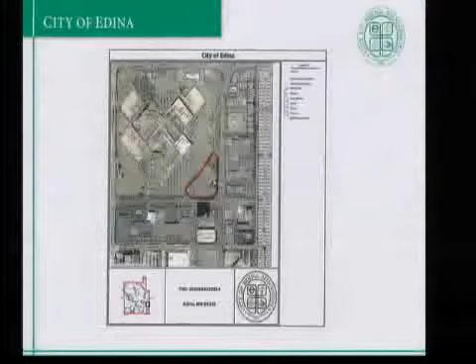Thank you, Chair Grabiel, members of the Commission. Before you is a development proposal for the southeast corner of the Southdale site. Specifically, the site is located at the intersection of 69th and York, this location here. It exists today as a kind of an overflow parking lot for the Southdale Center and the restaurants on the south end, and also a park and ride facility for Metro Transit.

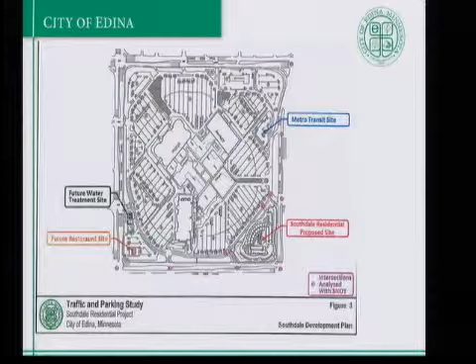The Metro Transit facility is to be relocated up into this location here, close to the JCPenney parking ramp. Just quickly show you a couple of elevations of what that facility might look like. Still working on those plans, but that would be located up here. The proposed development would be located here. As you recall, when we talked about this in the sketch plan review, I believe members of the commission asked the applicant to provide an overall or a future development plan for what they envisioned Southdale in the future. And this was what was submitted. Really, the only additions would be they're seeing a potential for a restaurant site out on the corner here, and then the future water treatment site that would be located under the water tower.

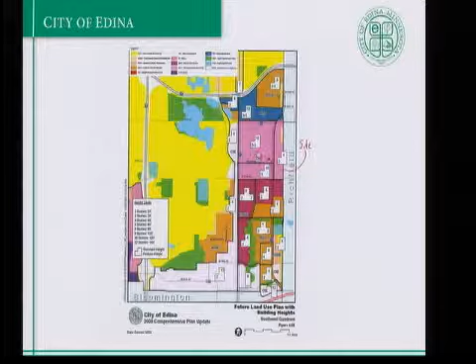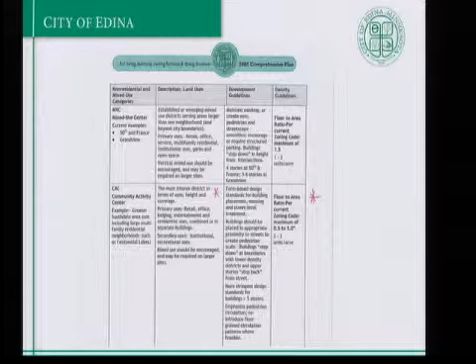Moving on, this site is located in the Community Activity Center as defined in the comprehensive plan. It guides this site for building height up to 12 stories with a 3 to 5 story podium height suggested brought out to the street. This site is the most intense zoning district in terms of uses, height, and coverage that's allowed in the city. The floor area ratios allowed in this property are up to 1.0, and the proposed development is just at 0.43. So the site is actually quite underutilized in terms of the floor area ratios that could be allowed at the Southdale site.

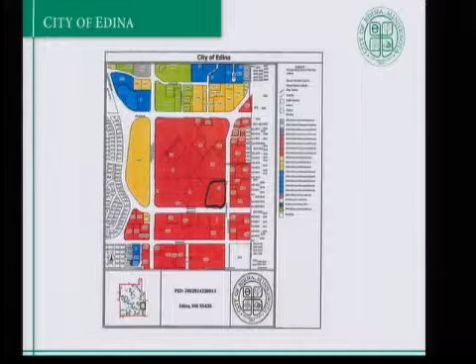The site is zoned PCD3, our commercial zoning district. Residential uses are a conditionally permitted use in that zoning district. The idea is to integrate residential within commercial property. So what the applicant is proposing is to construct 3 new buildings that would total 232 rental apartments and condominiums. There would be a 10-story building proposed along York, located here, a 6-story building along 69th, and behind it a 3 to 4-story rental townhome project that would face inward or face Southdale. For perspective here, this would be the Westin to the south. This is the 4-story apartments, kitty corner, and the CVS pharmacy.

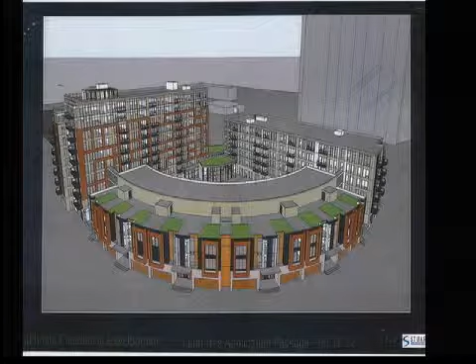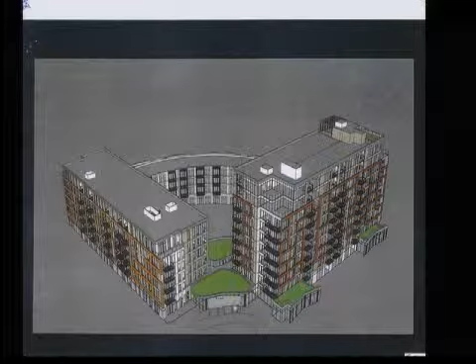They're proposing a series of green roofs. This is the podium. We talked a little bit about that in the sketch plan review, and I believe it was all the way across in that review, so they've shortened that up somewhat, and these 1-story bump outs are proposed. This is that main entry off of 69th and York, right at the intersection there.

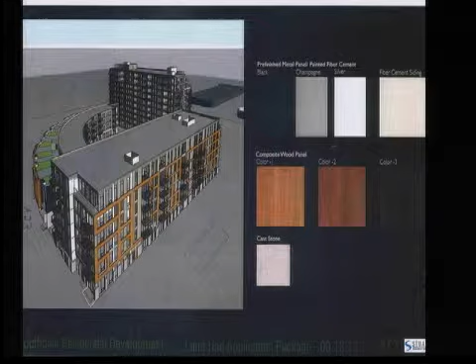The construction materials would be a composite wood panel with varying colors, pre-finished metal panel, cast stone and cement. The applicant has a materials board for you to look at this evening, and they'll go into more detail. It's somewhat similar to the project Stuart is building in Bloomington on American Boulevard, though the materials there are brick, so there's a change.

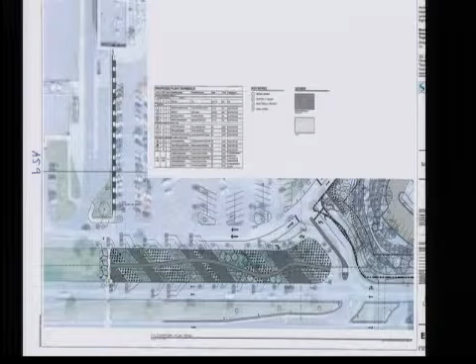They're proposing a series of pedestrian connections. What's highlighted in green would be the new sidewalks they're proposing; the orangish color is existing. Residents wanting to access Southdale Mall would come out to 69th Street and cut across what is basically a vast green space today. This is what it looks like today, where they'd install that sidewalk and connect with an existing connection from the Galleria up to the south side restaurants.

The request before you tonight includes a site plan review, a conditional use permit to allow the residential uses, a front yard setback variance from the required 115 feet, based on building height, down to 63 feet, and a parking stall variance for Southdale from 6,747 stalls to just over 6,400 spaces. They're also requesting a replat of the entire Southdale site.

The access into the site is similar to the sketch plan we looked at previously. It would be a right-in, right-out on 69th, and an additional access off the frontage road for Southdale, which would be turned into a two-way for better access for residents. They would also utilize the existing entrances into Southdale along York and 69th.

Parking for the project would primarily be underneath the building, with 287 stalls underneath, accessed from the north and west sides. There would also be a couple of surface lots on the south side and a smaller one on the north side, totaling 55 stalls.

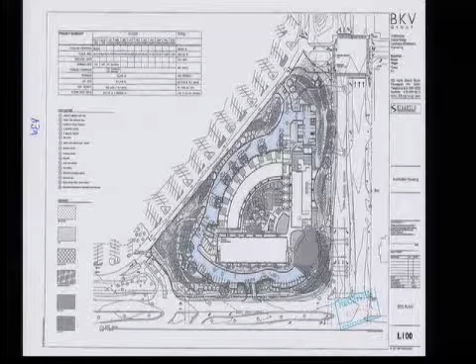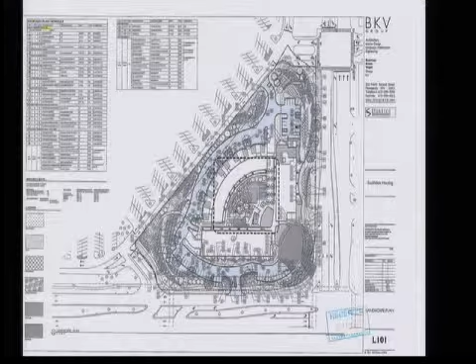They're proposing extensive landscaping. Primarily the site is all paved out there currently. Based on the perimeter of the site, they need 54 overstory trees, and they're proposing over 130, with a full complement of understory trees. So there would be quite an increase in landscaping and green space with the project.

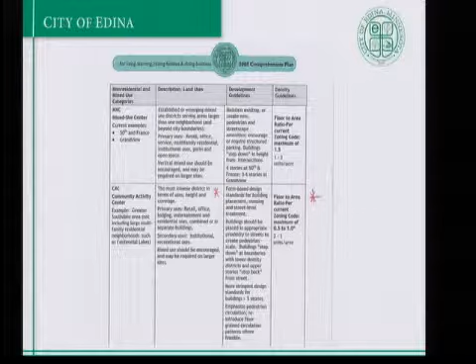In terms of the comprehensive plan, as touched on earlier, it encourages mixed use. This would be the first residential element introduced onto the Southdale site. And again, the site is really underutilized when you take a look at the floor area ratio for what could be allowed here.

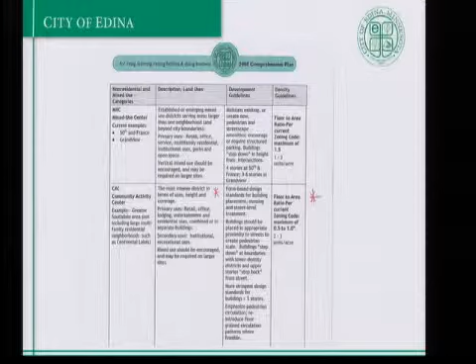Some of the policies and goals in the comprehensive plan that this project would meet include locating prominent buildings to visually define corners and screen parking lots—we saw the elevations from 69th and York—providing sidewalks along primary streets and connections to adjacent neighborhoods along secondary streets, and increasing mixed-use development supported by adequate infrastructure and roadways.

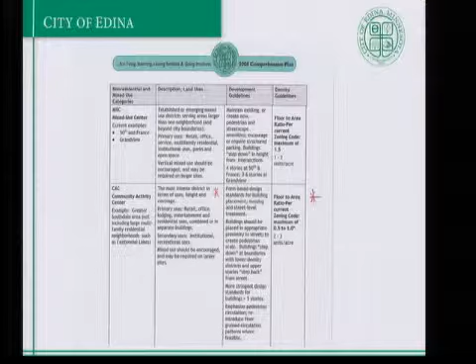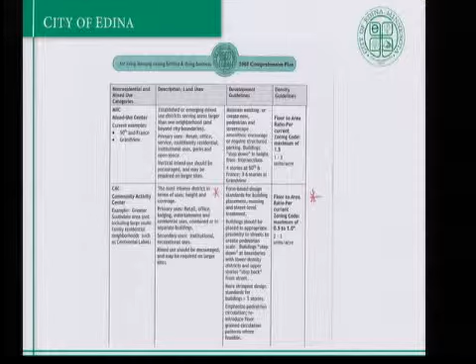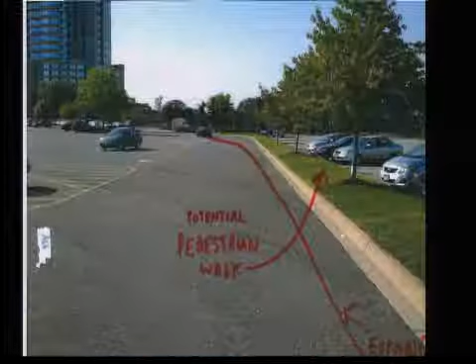We're just providing this as an example; it wouldn't necessarily have to be this way, but there is an opportunity. There's an existing green space located right here that could lead right to that mall entrance. This is a look at that green space today. Potentially it could be widened out, maybe losing a couple of parking spaces and shifting the roadway over, but it would provide that connection to the mall. So we're suggesting that a condition of any approval would be to add that additional connection.

A traffic study was done by WSB. Chuck Rickart is again with us this evening. The study concludes that the proposed use wouldn't change the level of service on adjacent roadways. There is a recommendation for additional queuing space along 69th to allow left-hand turns into that center, which is suggested as a condition of approval.

Parking study was also done based on that parking variance that's requested. Based on all the uses at Southdale—the restaurants, the theater, the square footage of the retail space—over 6,700 spaces are required. Overall, the Southdale site would provide just over 6,400 spaces, so there are 305 stalls short.

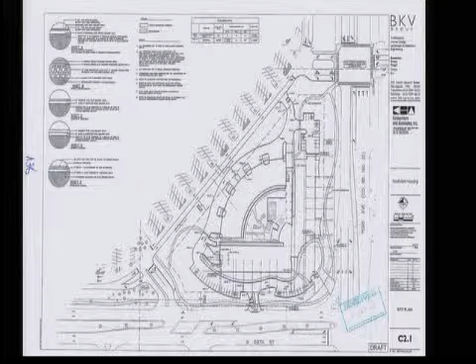That variance is requested. The study concludes that 5,952 stalls are necessary to support this project. Also want to remind the Commission that back in 2001, a 759 stall parking variance was granted for Southdale when the restaurants and the theater were added to the center. So there is an existing variance, and the number of stalls required is actually reduced, based on the square footage of the center changing and the number of restaurant seats within the center also being reduced.

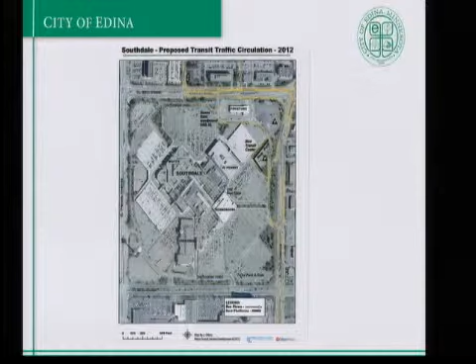In looking at the conditional use permit criteria, staff believes, as outlined in the memo, that all the conditions are met as long as that additional pedestrian connection is made with Southdale. In looking at the variance standards for the two variances, staff believes that the request is reasonable. The variances can be supported.

The city code, as we've talked about in the past, suggests that buildings be pulled up to the street to create that active pedestrian environment between buildings and the street. The requirement for the large setback runs contradictory to that policy and goal of the comprehensive plan.

The Southdale site is unique in itself, given it's an 80-acre parcel, a little bit underutilized when looking at the floor area ratios. We feel that the building is in character with the area and would fit in given the varying heights located out there, with the west end at 18 stories, and Southdale roughly equal to the 6-story project. The parking stall variance, based again on that study, is reasonable.

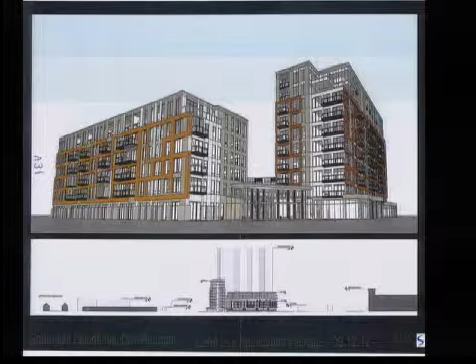If parking were ever to really become a problem out there where there was a shortage, there's plenty of room on the site to build a structured parking if needed.

As I mentioned before, there is a subdivision request as part of this application. Currently there are 9 lots that make up the entire Southdale parcel. As a result of the replat, there would still be 9 parcels. What they're proposing is this area in purple would be combined with the larger Southdale site here, and then they would create the new lot down here for the development. So it's just a shifting, essentially, of that lot down to the south.

Because there's no additional lot being created, park dedication fees can't be collected by the city. There's no new lot being created.

The primary issue and conclusion for the Planning Commission to consider is whether the proposed development is reasonable for the site, including the conditional use permit, and whether the variances are justified. As staff has indicated, we believe the proposal is reasonable, that the conditional use permit criteria is satisfied as long as those pedestrian connections are made, and that the variances are justified. So with that, staff is recommending approval of the site plan with the variances subject to the findings and conditions in their staff report, and the conditional use permit, again subject to the findings and conditions, and the preliminary plat approval. With that, I can turn it over to the Planning Commission for any questions.

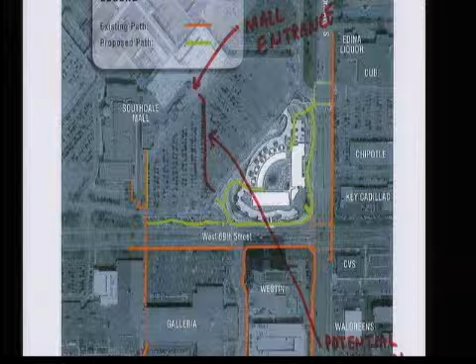Commissioner Fisher: Mr. Rickart, when you were doing the traffic review, I found it interesting, the recommendation to put the left turn lane on the westerly drive in. Coming that way to the mall today, every time I drive by there I think, why can't I turn left here? So I'm always doing that move back around. Do you know why historically that wouldn't have had a left turn lane there? It seems logical there would be one, but I didn't know if there was a traffic reason why you might not want it.

Obviously I wasn't involved in the original studies when they switched the internal circulation on the mall, so I can't tell you why. Unless there was a concern back then that traffic would back up to France Avenue for some reason, that's the only thing I could think of. But there's really no need not to have it. I didn't know if, as the traffic guy, you'd say oh, it's the old XYZ shuffle move they did—nothing scientific about it. No, not that I can see.

Maybe sometime you can come talk to us about the XYZ shuffle move. You'll need a long meeting for that. Other questions of Mr. Rickart? Thank you, sir. Would the applicant care to make a presentation?

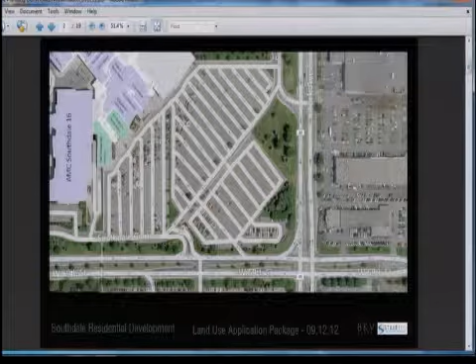Moving forward, I wanted to address part of the entry question to the mall that was raised earlier with the connection, and I'll come back to this later. There are two entries to Southdale, one here and one a little bit closer, right behind the Cheesecake Factory.

Looking at the new site plan as it has advanced from the previous scheme, we wanted to point out how we've incorporated a lot of sustainable features and enhanced the streetscape from what is presently there, the impervious surface of the parking lot. We've replaced a lot of that. Right now, this site plan has 42% pervious surface, taking it down from 100% impervious to 60%, and we feel that's quite well achieved.

We've done that with a lot of berming instances. There's one here to the north, you can see another here, and as you come around the corner in some of the images you've seen, there's one wrapping the entry at the corner of 69th and York, as well as some more along the back and the southwest corner.

With those berms, we're almost doing a reverse to capture a lot of our stormwater with stormwater gardens—taking a berm that goes up and inverting it so it goes down right next to that, planting it with flowers, plants, rain garden types of things, and letting stormwater filter down through that, helping the site very much.

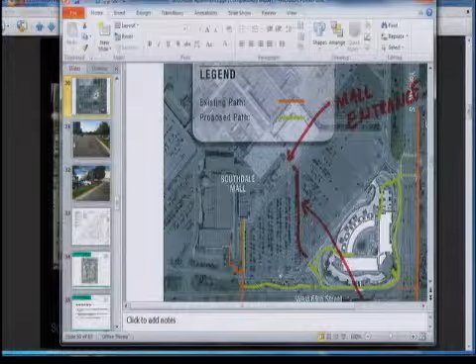One of the other questions you were asking about was bike parking. We've added bike parking right here at the front entry, more bike parking back by this back connection, and as you move through the site and come to the back entry, there's bike parking there as well as bike parking inside the parking garage.

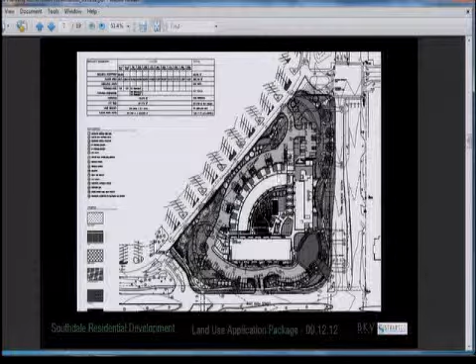In the amenity spaces, we have a pool in the center, and I do have a close-up of this one if I can get it zoomed in, please.

So this is the enhanced central courtyard. I know there was a lot of discussion about making it an amenity space. This is the club room with the green roof you can see here as you move from the front entry through this space and exit out into the courtyard.

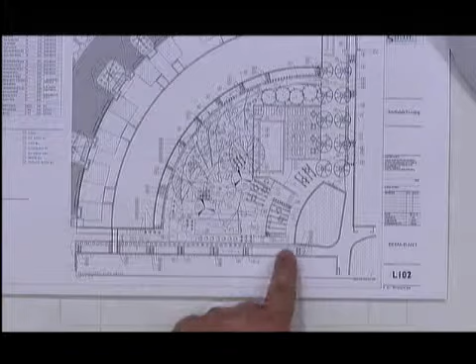What we're creating here are some unique little pergola spaces. This space has a grill section, some tables and chairs, steps down and a ramp down into a lower section with another pergola and seating. We have a focal point of art or a fountain located at this point.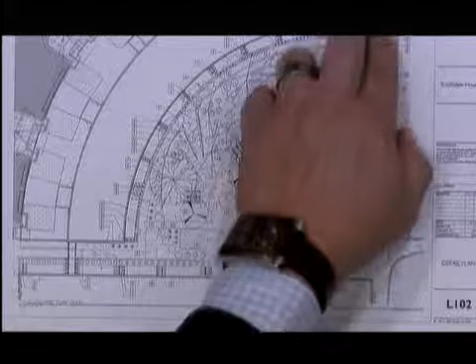We have access from the north coming down this walkway with some beautiful trees and planters to create a great look. Again, a focal point of art here.

As you move to the central courtyard, we have a pool enclosed by a wall and by another one of those berms I've been talking about. Some earth wraps around this, so it's cut out within that space with a little decking.

And the pool space here. We wanted to create some contrast between active and passive spaces, spaces for exploration or meditation, kind of loud and soft, if you will.

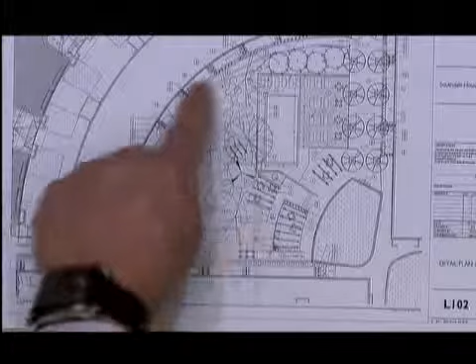So within this space it's a little bit more wooded. Because we are not over the parking garage here, we can plant big trees and they can grow to quite large sizes. So we're planting a lot of larger canopy trees here with a couple little nooks out in the forest for people to go and sit.

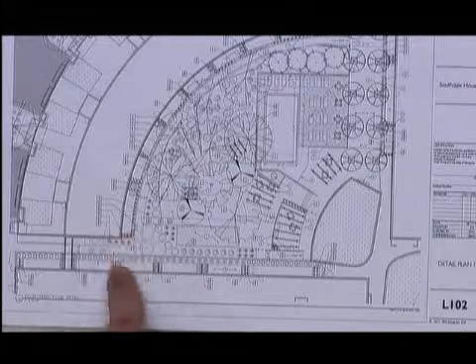We have a bocce court along the south edge for some active play space, and then a walkway all along the back for residents to go to their individual patios and entrances to the flats. Those are also along this edge.

And you can see here the green roofs on top of the condominiums, which will give a great amenity to those spaces. So with that, I'll turn it over to my colleague, Mike Krish, to talk a little bit about the architecture, and then we'll both stand for questions.

Thank you, David. Mr. Chair, members of the commission, my name is Mike Krish with BKV Group, and I wanted to speak a bit about the architecture. I'll try not to take too much time here, but I wanted to speak about a few things that create the character for the project.

But first, stepping back regarding the process for the project, I'm going to go back here one. Oops, I will leave it. The process, as we looked at the site.

Part of what we thought was very exciting about this, the Westin had established a level of quality in the area that was new and fresh, that began to start invigorating Southdale as a prime center for the city of Edina. And we wanted to be able to capture that energy that was established and add on to that, and weave that kind of energy into our project that would begin to knit not only that project with ours.

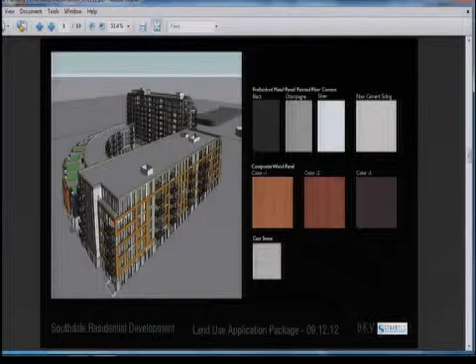In the 6th story, it wraps up to create the base of the building, and you find it in the individual townhomes along the curved arc. We wanted to make sure we integrated that, along with the use of rich colored woods and metals—classic, timeless materials we wanted to bring into the architecture, similar to how we looked at the neighborhoods to integrate those rich materials into the organization of the building.

Here's an image you've seen. The idea of using wood as this outside layer, like a coat or skirt that wraps the exterior, yet reveals elements behind it and allows balconies to bridge through it, creating a rich dynamic of materials.

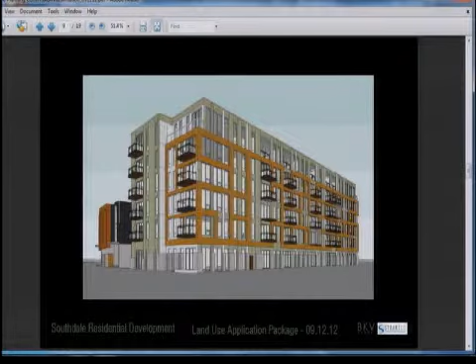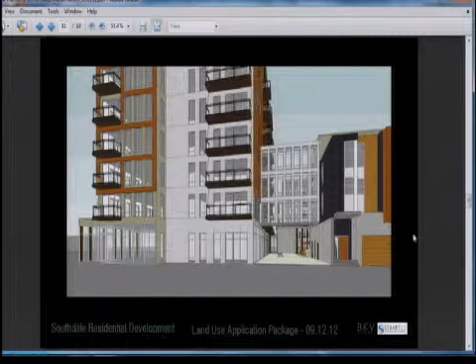As it wraps the corner, there's no two sides exactly alike, which is part of the elegance. As a pedestrian walks the site, every view changes—the building itself moves and becomes very dynamic. This is a view on the north side looking into the courtyard, revealing different layers of materials and bringing a high level of energy to the project.

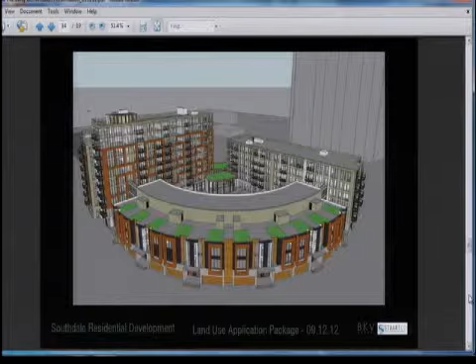The use of green roofs is part of what we're incorporating, so those roof surfaces become interesting and pleasing elements to look at even from above. As you go around the building, it's constantly changing.

Going back to the organization, we looked at the city's plans, which talked about reinforcing the grid and street edges. So we positioned this as a collection of buildings rather than one big monolithic structure—breaking it into 3 separate buildings, with the 6-story along 69th paralleling that street. We broke it where the main entrance is, reinforced by landscaping and the plaza, with a smaller-scale main entry piece that brings it down to pedestrian level and lets you see through the development to the courtyard and past.

Then we have the 10-story building paralleling York, creating a dynamic with the 6-story building. Along York at the base, we bumped out the first level for different functions—the main entry is its own form, and the fitness area bumps out as it marches along York to create its own podium component. The whole first floor has hiked-up materials to reveal the base and legs of the project, creating a pedestrian realm that's unique and differentiated from the building above.

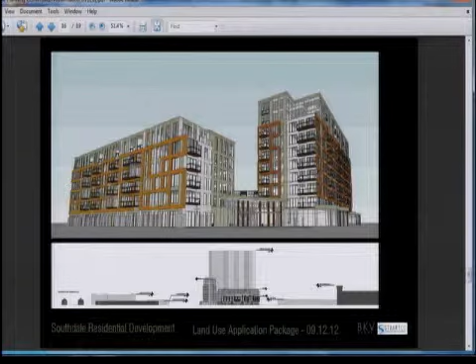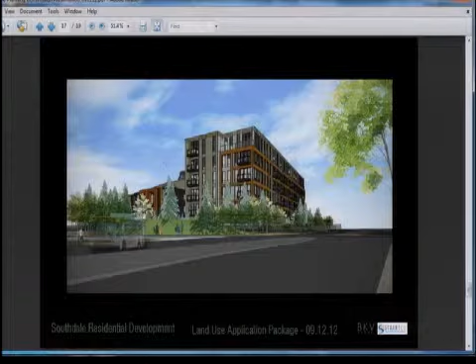It's also animated with residential scale and character through projecting balconies with accented black colors, adding another level of detail. Here are some images showing the integration of landscaping, which is very important, along with berms and trees. This isn't an isolated object—we're creating an environment that's pedestrian friendly, changing and moving throughout the site.

If you have questions regarding any specific details of the architecture, I'd be happy to answer those for you, but that gives an overall sense of the character.

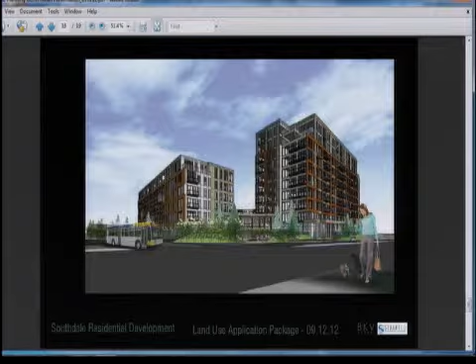And just to finalize, we thank the staff for all their hard work. It's been great to work with them. We have just, as I pointed out earlier, the one question about adding the pedestrian pathway in the location that staff is pointing out. We think we are meeting the intentions that the commission asked for with the pedestrian pathway I've outlined. So I just ask your consideration for that. And I think we're okay with all the other conditions.

Okay, thank you, Mr. Motzenberger. I got a couple questions, and we'll see if other commissioners have some questions.

You mentioned water. I assume that since you are taking what's now a parking lot and building on it and adding more landscaping, the water runoff will be less than what it is potentially now. That is correct.

I like the configuration of your sidewalk. It does go over, and you can access the theater as well as the upper mall and the promenade through the Galleria. But when I was in high school, geometry was the one math course I was good at, and the shortest distance between two points is a straight line. Do you have any objections to adding the additional suggested pedestrian access, which goes more directly to the mall entrance up by, was that Herberger's now?

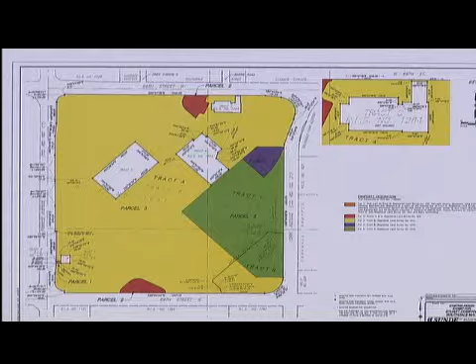So one of the things I'd like you to, and it may not be on this drawing, but I wanted to use this drawing to highlight the big picture. What I'd like to get a feel from you about is how do you see the backside interacting if you can envision for a moment something developed right across, right next to, outside those townhouse doors? What have you done in terms of the site plan to make it? What I don't want to do is back us into a corner that prevents the next thing from developing. And I wonder if you have some thoughts on that, and how you might share where on the upper left hand of this drawing, suppose something developed across there other than a parking lot. I don't know what it is, but something. How would your development interact with that?

Chair Grabiel, Commissioner Staunton, thank you. That's a good question, and it is something that we've thought about, understanding it in the present tense and the future tense, and how we want to work with the views at present and how that can be adapted. One of the key pieces we looked at here, this is an easy one because it's a simpler drawing to see just where the landforms are that we're proposing along there, to help screen some of that parking at present from the townhouses.

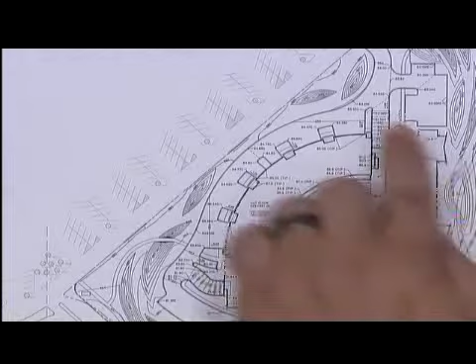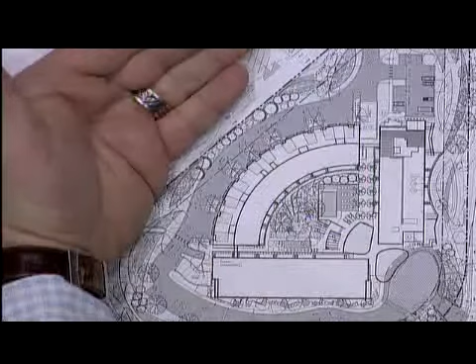However, because of the landforms and because this is planted in this location, it offers the opportunity, should there be something built across this, to reconfigure this. Even the plantings that are here now are configured in such a way that they start to create a corridor, so you almost start to have a street. There's an opportunity to almost mirror this on the other side as a front door to something that might exist on this side, so you start to create a street.

Some of these evergreens that are now screening views might be switched out for some canopy trees that could begin to create like an allée that is along most residential streets. You can still have some of the interest of the berms in there, but you begin creating a street envelope, and that building setback here could equal the building setback on the other side, creating some nice space there. So I think it is set up for that opportunity.

Thank you. Commissioner Schroeder? Well, I've actually got a lot of questions, but I'm just going to focus on one for now.

I want to go to the issue of the setback relief that you're looking for based on our staff's comment about creating an active pedestrian environment at the street. You said that you think you have a decent enough buffer, and I'm curious what that really means, because if we're trying to create an active pedestrian street, we don't actually want a buffer. We want the development to interact with the street, not separated by a buffer.

I think you're going to come back and say the traffic will be buffered, but I want to know how the two interact. We're granting significant relief, and where we've looked at this before, it's been to create active storefronts. In fact, when we had a proposal, which is now CVS, the former proposal was actually talking about an active pedestrian street front being created by having active operable doors on the sidewalk that's in the public realm. And we don't have that.

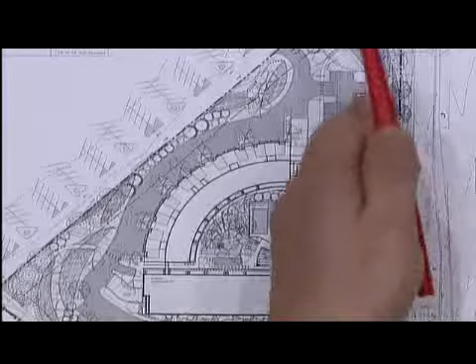As with anything on a heavily traveled street with no other active frontage on this side, we think that we're striking a balance between bringing people close to that street and giving them ways to access north and south and across, but still, as you alluded to, buffer them from the traffic.

With this space here, I'm trying to look for a scale, but from the property line to the front of the building is about 63 feet. So you're quite far back for any of the pedestrian uses here, but you're then about 30 feet from the walkway. So people that move through this walkway can take advantage of seeing the folks out on their decks and grilling, enjoying the summertime. At this location right here, they're very close to the fitness opportunity, so people working out, you're bringing that vitality out into the space.

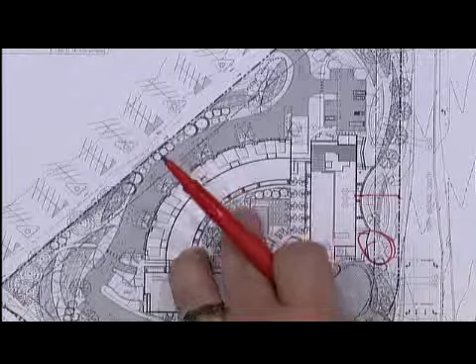And I think the intention with this building is, it's not a mixed-use building. The market is calling, in this instance, for a residential building, and that's what we're providing. We're trying to accommodate some of those uses in a residential sense. I'm seeing a lot of mixed-use buildings that are going without and having a large struggle filling those first-floor spaces right now. But the main reason is that this is a residential building, and we're trying to get residential uses that are active and bring them out. Of course, we wouldn't want a football field or anything like that out here, so we're trying to strike a balance. I hope that answers your question or moves towards it, but that's our goal.

The other thing I want to ask about is there's another frontage here, and you talked about that frontage, particularly as you move west past your project, that it would be landscaping creating the active frontage along the street. Can you talk a little more about what that really means? I'm curious how landscaping, regardless of what angle you place the plantings at, actually creates an active pedestrian environment unless there are people actually out there.

Yes, I think that's a great point, and I would want to clarify that. I think the way you're designing the landscape, what we're proposing with the layers that you're moving through, we're creating this set of layers that you move through as you walk through the space. As your angles are moving in this direction as you're crossing them, that's a visual excitement to the eye. So in an active sense, that's my reference.

And as the pedestrians move more and more, again, as we've indicated, the goal of this is to be the kind of catalyst. Hopefully in the future, more corners will develop, things across the street will develop, and there'll be more and more people traversing this, coming up from the south, from Centennial Lakes and the Galleria, and maybe moving off to visit people at this location or continue on to Cub. And so that space will get more and more pedestrian traffic, and hopefully that will activate the space.

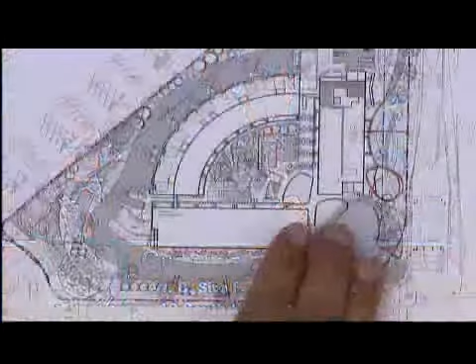Commissioner Schroeder, if I may add, the main focal piece of this whole project starts with where the entrance is. We've set that entrance facing out to York and to 69th, and I just want to make sure that's not overlooked. That's where all the energy starts, at the entrance where we've created a drop-off area, the main entrance to the building. We have our fitness facing out to York Avenue that can be used 24/7.

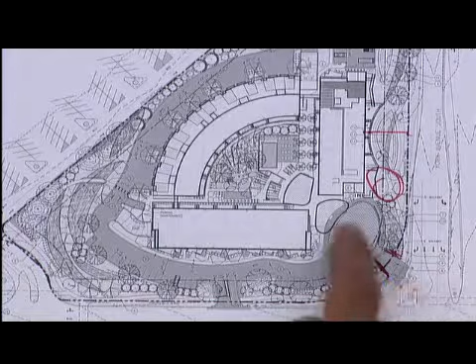Within the front door, we have a computer cafe that looks back out onto the plaza. The plaza we see as being inhabited with people. We have benches and places to sit all along this. We cut through with the berms and create benches at the corner that create a pedestrian scale to the development, yet allow people wandering about to cut through to the main plaza, the main lobby, the computer cafe, the main concierge reception area. All of that is part of that front door, which we think is activating the main streets, which is York and 69th, and we think that is very important.

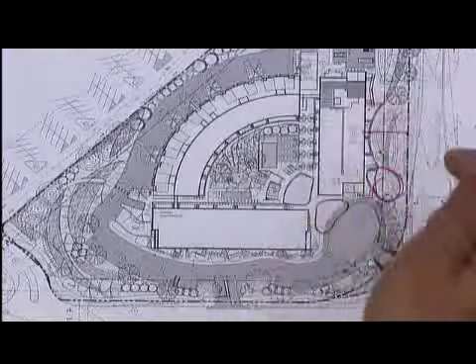Like David mentioned, the dwelling units on that floor have their walkout patios, so there are doors that occur. It is not a mixed-use development, but on both York and along 69th, all of those dwellings have patios and walkouts as part of that area. So it's not just landscaping, it is the people living there that create the activation.

I appreciate what you're saying about the front entry, but that part, just guessing from the scale here, doesn't need the setback variance. The most active part of your building actually doesn't require the setback relief that we'd be granting you if we look at this favorably. It's the part that doesn't have the most active part that we would be granting the variance for. And there's a contradiction in there.

Commissioner Platteter?

Yeah, I had a couple questions, comments. I would definitely agree with Commissioner Staunton. I look at this and I think you just plopped an island in here in a way. The connections, you do a lot of internal pedestrian pieces, but I'm having a tough time seeing how you're connecting everything else here. In particular, there's no way to the transit stop to the north, at least not shown on here, how they get through there.

I really think you need a path to the mall, and you can say what you will, but people right now are going to walk right across those parking lots. You're going to have the same situation, even worse, because you've not acknowledged that and you've not put something in there for a decent straight-through path. I agree, geometry is a key trait here. I really believe that, and I think you really need to take a much harder look at it, because you want to integrate this with the rest of the site and not just create an island where there's a lot of internal circulation, but you can't really get anywhere.

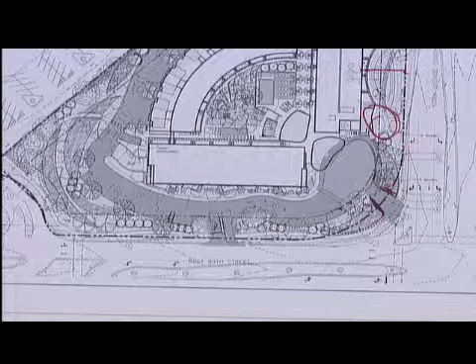Again, I think when you start doing all those situations, you really start to force people away from what they want to do. People are still going to try to cross there because it's the straightest shot. I think we just need to acknowledge that the easiest way to get somewhere is a straight line, and we need to make enhancements to go along with that.

I would also agree that with the left turn lane down the block at the movie theater, I too wonder why that's not there. But also, when you're doing all this, to take some pressure off of this intersection and get back to enhancing the pedestrian paths around here, anything we can do to take traffic off this street will help with getting people able to walk around this area.

Commissioner Fischer? I have a few items, but just as a follow-up to Commissioner Platteter, I agree mostly with what's been said about the connection to the mall. I think it would be worth looking at that pretty closely, the direct connection. But I would also not like to see those trees lost. When you look at an aerial photo of the whole mall property, the green strips are really nice. You don't want to lose those for the purpose of pedestrian movement.

So I think it was the staff diagram where they suggested maybe there's a way to make the thing a little wider. I understand the concern about having pedestrians right on the edge where the cars are moving, but at that point the cars are moving at sort of a parking lot pace, we hope. I would just look at that.

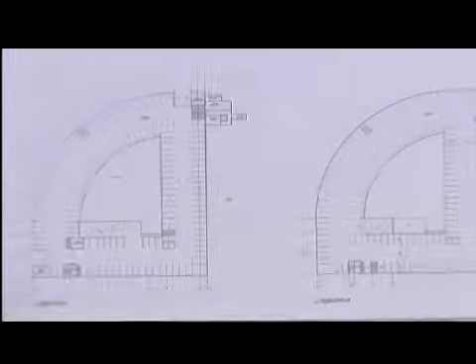Actually, if you look at the plan on the left-hand side, there are 2 access points into the ramp - one on the west side, the other on the north. We're a couple of feet down from the main floor elevation, and we're ramping down outside, and then 25 feet within the building to get into that lower level garage. So we're ramping down partially outside, partially inside, to get to the first below-grade level, and you can loop around that donut shape for the parking. Then, to get to the lower level, you continue on, and there's a secondary ramp to get you down to the next level.

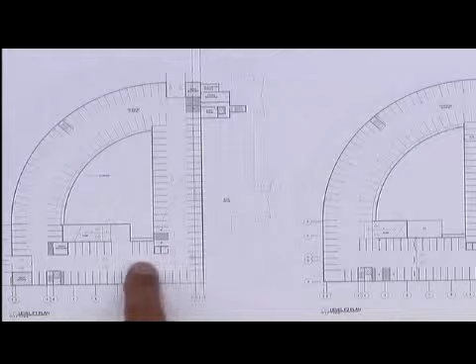So when you say secondary, that's the only way to get down to the next level, is it not? Correct, right where your finger is. You're fully confident - I'm just trying to guess at the dimensions - that those movements can occur there in a safe manner? Yes. Cars are going to be coming up there, as well as cars going down. It's designed to accommodate two-way traffic on these turning radiuses. That turning radius is no different than turning the corner, for instance, here.

And so the speeds have to occur at a safe speed, but it's within a ramp. People tend to drive slower anyways to navigate, so they can make those turns. It's just a little bit of a blind corner, but it's not that it can't be resolved. Sure, we can absolutely take that into account, and we'd be able to open up the wall here. We don't need a wall here.

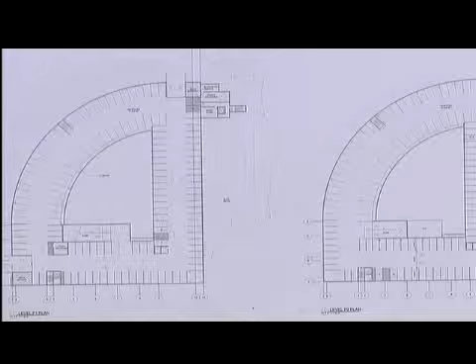We can do things with lighting and the widths of the ramp here to make it very safe. Okay, and then the other question relates to trash and recycling. Only because I have to take that one from Commissioner Schroeder, it's normally his deal.

So you might as well start right here in the parking level. Can you kind of walk backwards? What's the process? I just had pizza and I'm going to go get rid of that box or whatever. How does it get from there to away from the building?

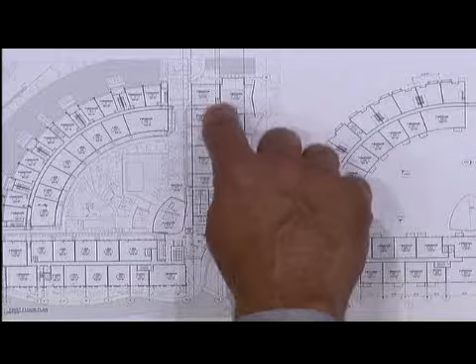On the upper levels of the plan, at any level, you can get to this corner location here, or the opposite on the other side here, where you access trash chutes. Those trash chutes, you can dump your recycling in one chute, trash in the other, so we're accommodating both at both locations. Those drop down into the first level trash rooms at these locations.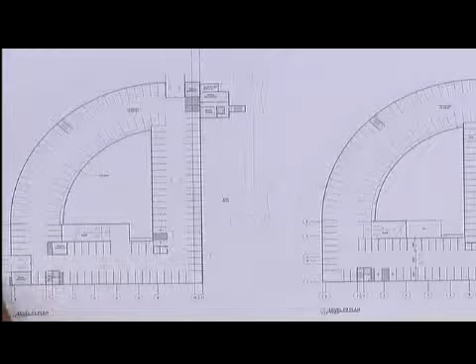And then on the given trash day, those would be wheeled out by the maintenance staff out to the west side here, out to the site, and so on trash day they'd be wheeled out on the site half hour before trash pickup occurs, and there's a trash pad here. As soon as those are done, maintenance staff will take that back in. From this location, the trash will be wheeled out over here as well, and so it'll be picked up in one location.

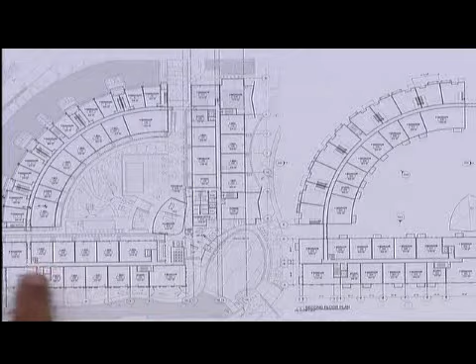Move-ins and loading, site plan here, first floor plan here. This will work just fine. Move-ins occur off of the main drive around on the west side here, and as you pull around, you can either pull in or back in to a pull-off area that's off of the drive, and you can park there. Then you would enter into the project into the freight elevators here that will get you to any level. We also have an area up on this side as well where you can move right into the building here into this freight elevator to get you to either side of the building. So it's equal distance to access any part of the building.

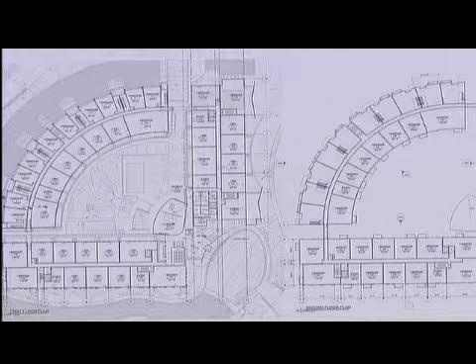Funny how you anticipated my third question. You can see the pattern where I was going with it. Yeah, so thank you, I think that's it for now. Other questions of the applicant?

Mr. Motzenberger, I have one perhaps final question for the applicant. Southdale Mall is a very important thing for the city of Edina, and maybe you or your colleagues can address some of these. Over the past several years, we've seen a decline in activity at Southdale. I don't even remember the name of the place, it was where Herberger's was, Mervyn's, yeah. Some of the restaurants now behind the Cheesecake Factory are closed. What do you see, and what does Simon see? What's going on to rejuvenate, rehabilitate, rebuild that whole block? Because that is such an important area for the city of Edina. We don't want to see that. We've seen police reports where there's been problems in there, not recently, but in the not too distant past.

You're very right, and we looked into that too before we went ahead. But I'm not with Simon, I can't respond, but there's a lady here that can. Okay, you want to talk about yours? Sure.

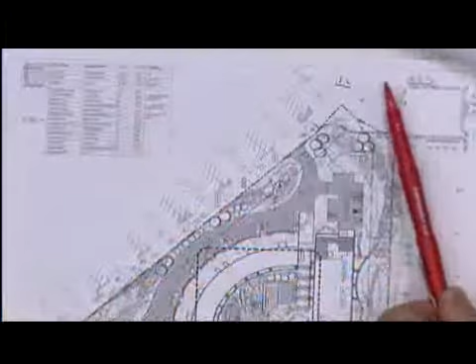Regrettably, we didn't have that, and we're happy to look at it. Commissioner Platteter reminded us as well about a connection to the transit center, or at least an idea of how that might occur in the future as other pieces of the mall develop. Right now, there is a transit station right up here across this intersection. So by enhancing this intersection, making it a lot safer with pedestrian striping and connections from the building here, the front door gets people to this transit center. There's also one directly across 69th in front of the Westin, I believe - if I'm incorrect there I apologize, but I know there's this one. So transit is easily accessible for the residents at this location, and eventually, over time, perhaps we can explore how we might make those connections to the transit center.

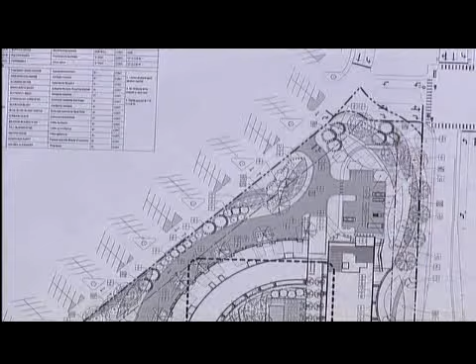Well, I guess that's my concern—if there's a transit area, and they're taking a bus that isn't on the route where that stop services, they're going to want to get over to the main transit area. That's what we should probably be looking at now if we're going to evaluate whether this meets the criteria.

I was just informed by my colleague that as part of the Southdale Transit Plan, they will be adding sidewalks along York that will connect. So we can get that plan and make sure that ours at this intersection connect in. Good, thank you, that's helpful.

Other questions of the applicant? Commissioner Fischer: Could you bring that material board up here for one quick second? My question architecturally is about the wood panel pieces. Can you explain—normally when you think of wood on the outside of a building, it looks beautiful, but what will this look like 10 years from now? Is this a panelized product? What do the panels look like?

It's a high pressure laminated material. It's not wood—it just looks like wood, but it's a laminated product for exterior conditions. So if I say knock on wood, it's really not. You're really not knocking on wood, okay? I mean, it's a great look, but I just want to make sure it's going to be a great look for some time.

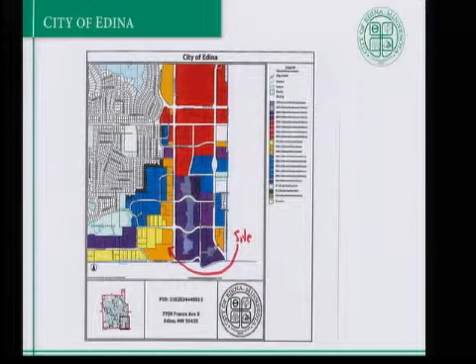Thank you, Chair, members of the Commission. This property is located at 7700 France — the last property on the Edina-Bloomington border on France, on the west side. The property is 17 acres in size, currently zoned POD2 Office District. There's a 6-story, a little over 300,000 square foot office building, with a large parking field to the west. If you drive by, you might notice it's parked full of Toyotas — it's leased space from a local dealer, so the site is quite overparked.

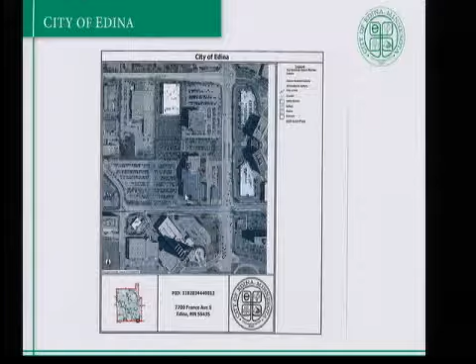This is an aerial shot. You can see the cars parked on that far west side. What the applicant would like consideration of is to construct a restaurant here in the northeast corner along France.

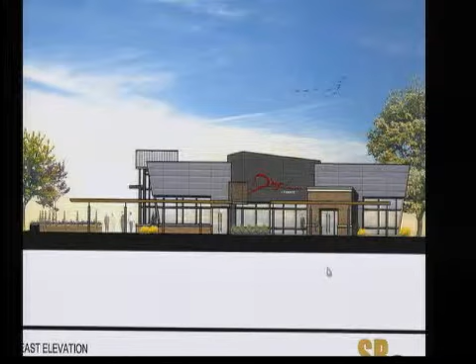A quick look at the site plan, the existing building. This would be the restaurant up here. In terms of setbacks and amount of parking spaces, this would be all code compliant. Another quick look, a potential patio to the south. A couple of illustrations of what the building might look like.

The primary issue here is that a freestanding restaurant is not a permitted use in the POD2 zoning district. We do allow them on the inside of office buildings. The idea behind that is they would serve people within the office. So it's currently not a permitted use.

So a couple of ways, if the commission believes this is an acceptable use on the property, a couple of things to consider. We could rezone the site to a site that would allow restaurants. PUD zoning would be a possibility here. There is some potential redevelopment on the site with that large parking lot to the west. PUD could be structured to allow this kind of use and then still utilize the POD2 zoning for the rest of the site. And then if they would want to do something in the future, it would be an amendment to the PUD.

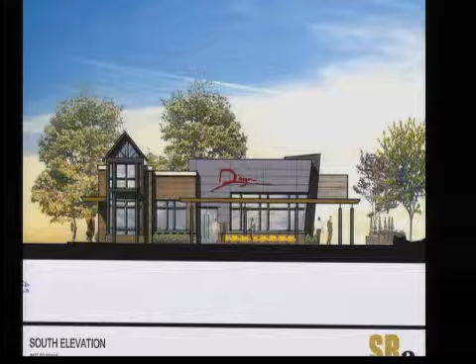Another option would be to allow a restaurant in a POD2 zoning district as a permitted use, a freestanding restaurant. So what I included in your packet is all the POD2 sites within the city. I'll just quickly go through those. There is a POD2 site located on 169 here on the west and 494.

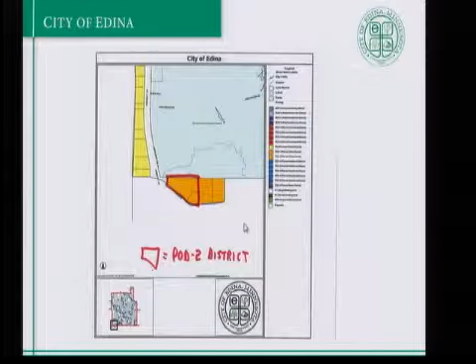This small site here is the Helmuth and Johnson building that was recently constructed. I believe the property here is owned by the applicant or the applicant this evening. There's a medical office building on that site. So that would be a site where a freestanding restaurant would be allowed if we were to change the code.

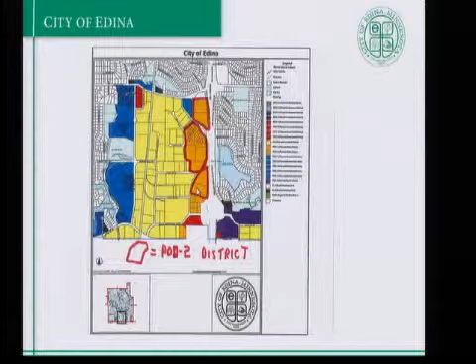Then along Highway 100, we have some existing office buildings on the west side where, if we were to allow a restaurant, these would be sites where a freestanding restaurant could also go. And then along France, here's the subject property that we're looking at. There's another office building to the north. And then straight west of Southdale, this entire site is also zoned POD2. So those are the sites that would be impacted.

So this is a sketch plan review, nothing binding, but simply to discuss the project and provide some feedback.

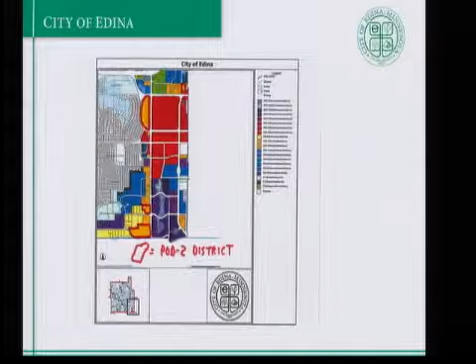Cary, how does Tavern on France, how did it get there? It looks like it's in this district, and that's a freestanding restaurant. It is in the POD2 district. That one is attached to the office building, and I'm not sure if any of the commission was involved, but when that was turned to a restaurant, there was a variance granted to that standard.

I had some discussion with the city attorney about whether that's something we could do here. He really felt that was a use variance because this is a freestanding structure, so he differentiated it between that. His recommendation is that we need to adjust the code in order to see this happen.

Chair Grable, can I ask? Commissioner Fischer: Carrie, as you've talked to the city attorney or anybody else around City Hall, do we know why it was important at one time to not allow freestanding restaurants in this condition? I mean, it's like, okay, you're okay as long as you're in a building where you're sure to fail because no one can see you. I just don't know what the rationale would have been at that time.

Yeah, I don't know. You probably didn't want McDonald's or Burger King or something. There's always one of those reasons, like there's some other kind of... Didn't want the row of McDonald's and Arby's and all that. Okay, that makes sense, that's what I would think. That's a very good guess, actually. That's why I'd be a little concerned about changing the POD wholesale with that.